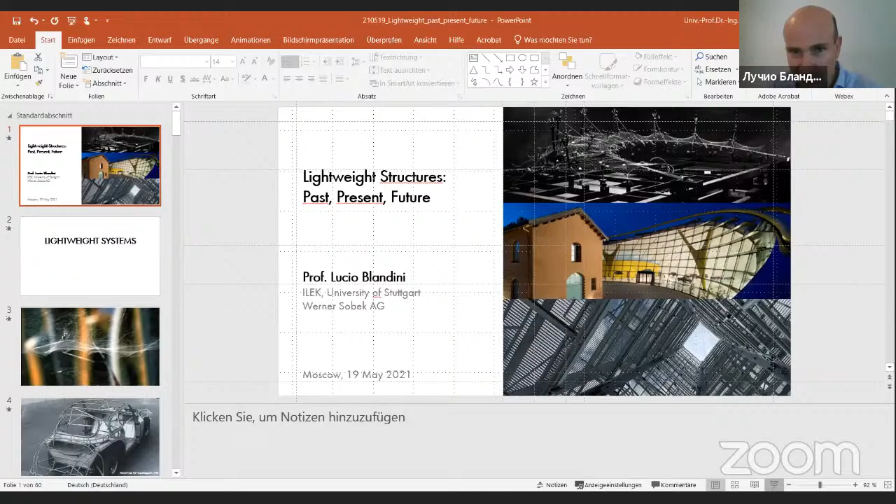I hope you can all see my screen. My lecture today is about lightweight structures, matching the exhibition ongoing in Moscow. It is about its roots in the past, its current development, and also trying to give a view, at least from our perspective, of how the future of lightweight structures and lightweight systems in general could be, given the challenges we all have to face in architecture for the coming years.

But before we get into the historical development of lightweight systems, I would like to go over the principle of lightweight: what we understand as lightweight, how many fields we see, and what sources of inspiration exist, because lightweight covers a really wide field. The very first source of inspiration is nature. It is not always like that, because nature does not always follow the principle of lightweight systems. But when we look at what a spider can create in terms of a lightweight system, this is an interesting source of inspiration, and it has been for a long time.

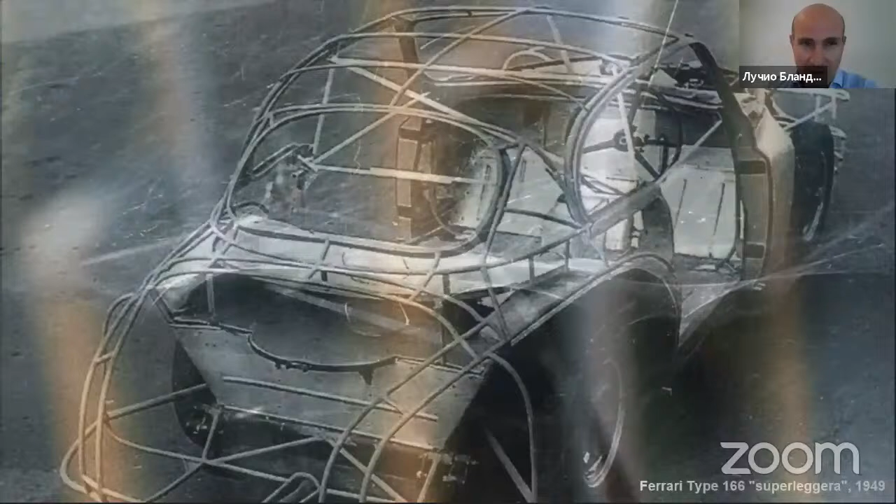There is a long tradition of lightweight systems in the automotive industry, and since we are following a historical path, I wanted to show this old race car made from Ferrari right after World War II, just as an example of how complex systems can be simplified, reduced, and optimized in order to minimize the amount of resources. At that time, it was about reducing fuel consumption, but today this approach has different consequences and interesting aspects linked to it.

On a similar perspective, we have a source of inspiration from the aeronautical industry, and the Concorde at the end of the 20th century was for sure a source of inspiration, pushing the boundaries in terms of material capacities of what a system can allow for—high temperatures, resistance to high velocities—and all of that was possible by making a very careful use of materials by combining them in a careful way.

Today we see lightweight principles adopted in sport, especially in the racing sport industry. Here, just as an example of many, the sail ship, which has been reaching a Guinness record in terms of velocity, exactly by using a lightweight approach and combining materials and design in a proper way.

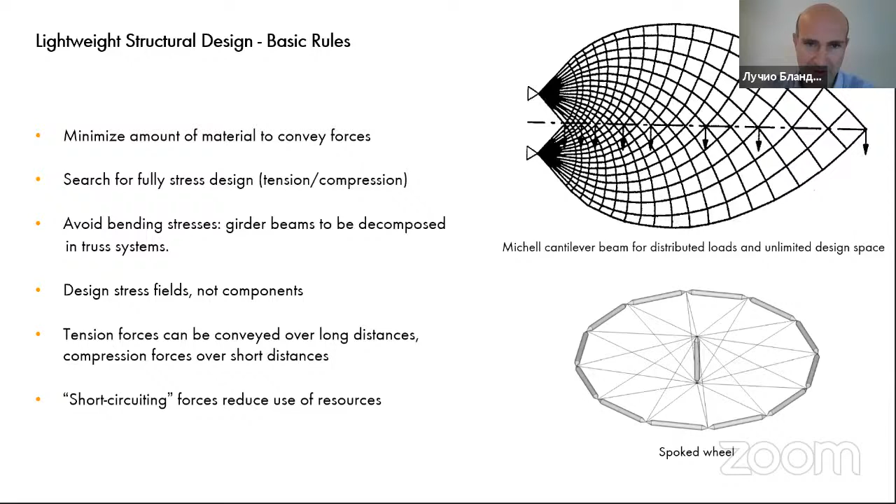So once at that, we can go through a kind of historical path over the last, let's say, 140, 150 years, starting with pioneers that at the end of the 19th century have been dealing with different materials and trying to make optimal use of that while reducing the amount of resources. There's been a generation at the end of the 19th century, at the start of the Industrial Revolution, dealing with steel and discovering its potential.

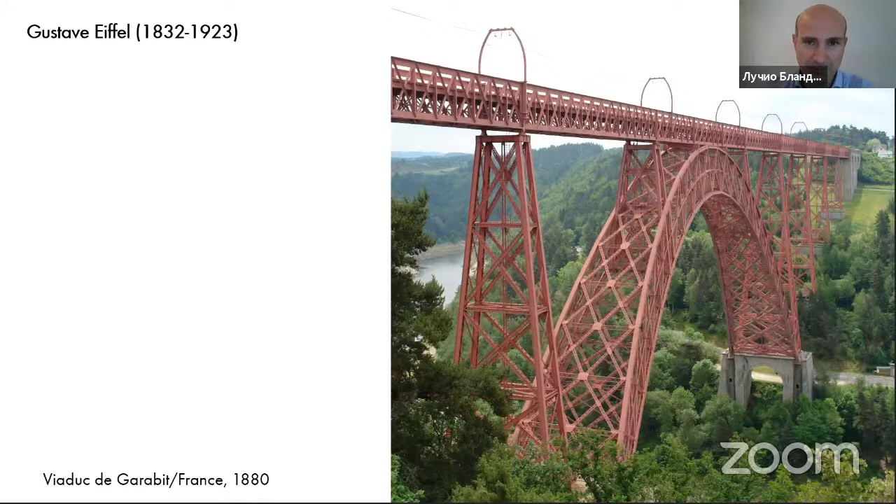Finding out that, like in this case, Gustave Eiffel did for a bridge in France, that by using truss systems, the amount of material could be a lot reduced. This is essential because, especially for big spans or big heights, reducing the amount of structural materials means being able to span or achieve bigger spans or reach higher heights without the structural dead load becoming determining. Even if we look at one of the most beautiful examples of this time, the Eiffel Tower,

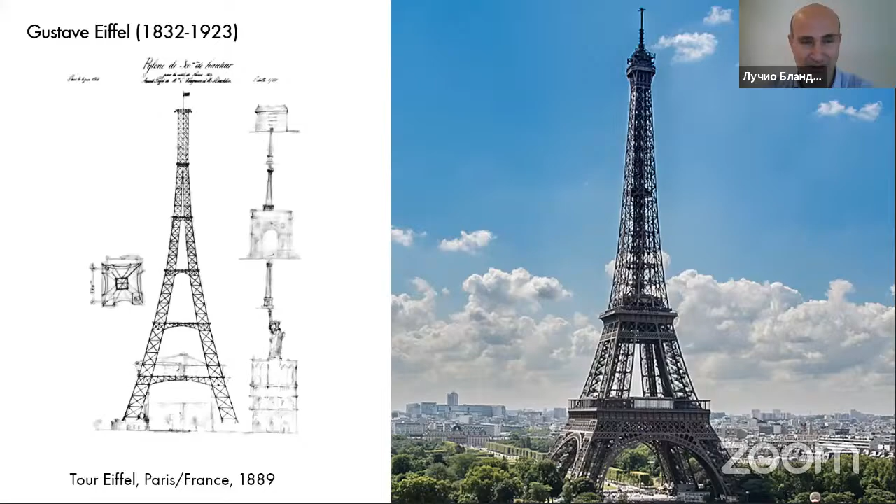What I find very interesting is that at that time, at the end of the 19th century, Shukhov was working for a contractor, and it was this tight collaboration with the manufacturing industry, and the scarcity of resources at that time, helping to push the boundaries.

And here, the power line, which is still nowadays almost 100 years after it was erected, is an astonishing example of how elegant the system is, not only in the final appearance, but also in the process of erecting it in an efficient way. I think this is what we need again today, to shorten the chain between design and construction to come to new ideas of how today such kind of resource efficiency can be achieved.

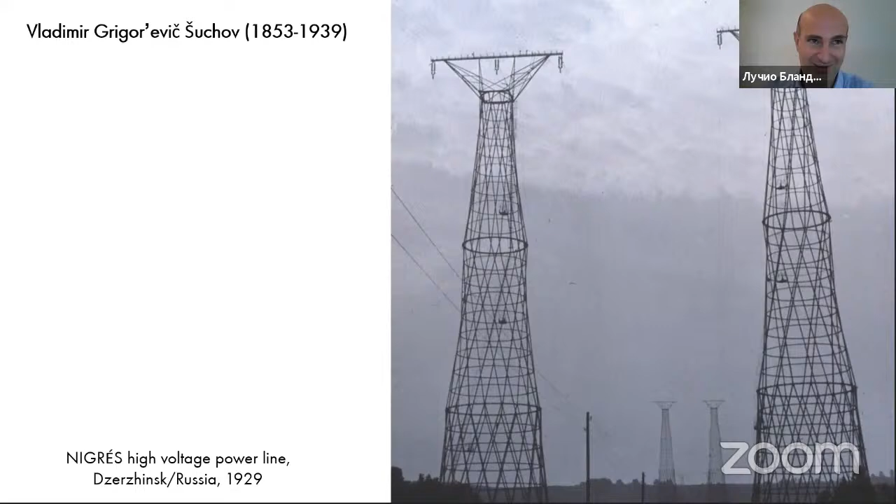So the past is not only an element to be looked at, but also a source of inspiration, and this is the spirit I put this presentation together in. When we look, for instance, at this bridge from Robert Maillart, it is incredible to see how at that time not only the form has been optimized, but also the construction sequences have been optimized to bridge this area. It still has, after such a long time, an incredible elegance in its form and in its capacity of getting embedded into nature.

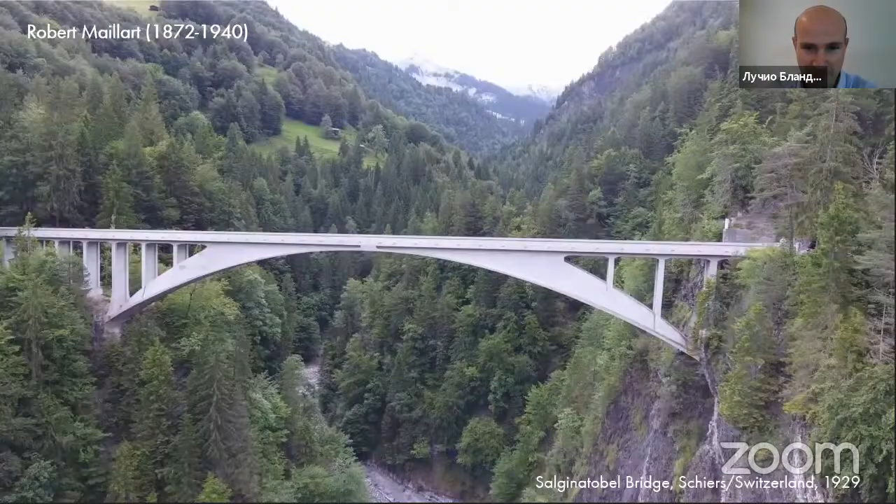It's interesting that after that, the most talented engineers have been challenging themselves with the use of steel. In the first half of the 20th century, the challenge shifted to concrete systems, and the interest shifted more from truss and tension elements into compression elements, just because concrete has a very good capacity to resist compression forces, and on top of it, a very good capacity to be shaped properly, following the forces. So there was a kind of competition between different engineers at that time.

And I believe this is one of the keys of lightweight systems nowadays: not to focus only on one material, but to combine the properties of different materials, and the heart of it is to join them properly.

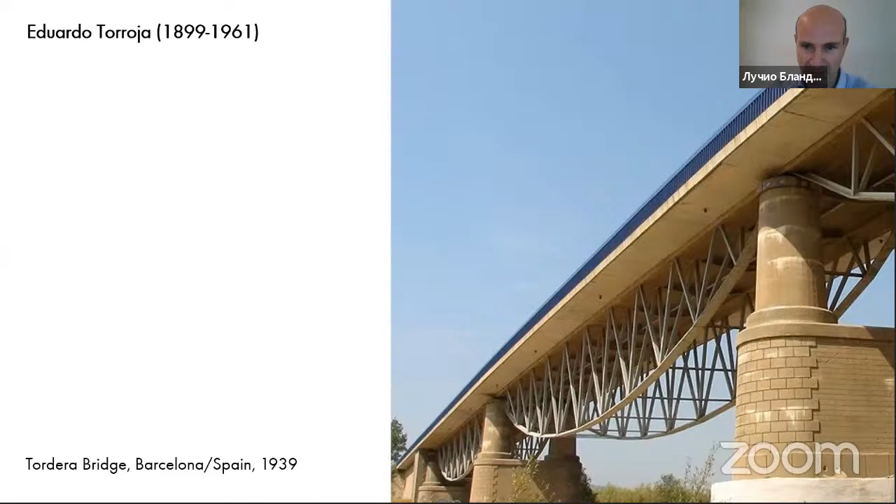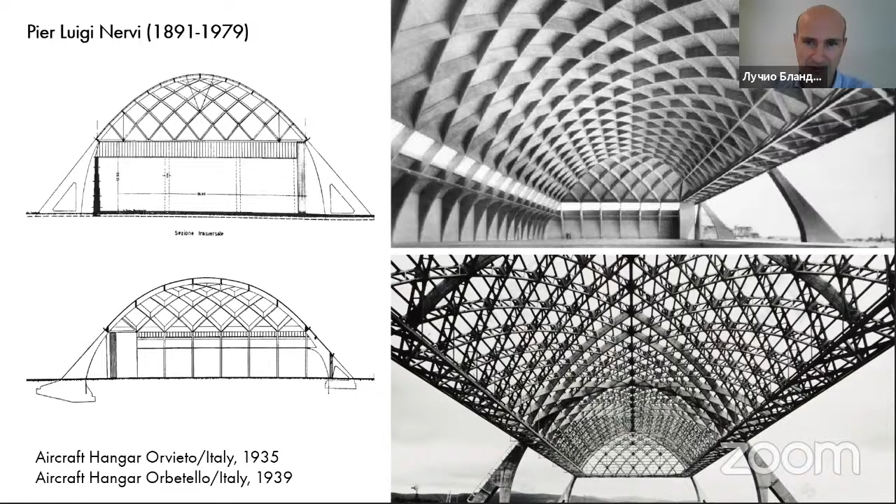One of the later results of this work is so-called ferrocemento, concrete with a high degree of prefabrication and a high degree of steel element, which can follow the paths of the forces. Remember what I was saying before about stress fields and designing stress fields—this is a clear example of that, materialized into an astonishing architecture which is still visible.

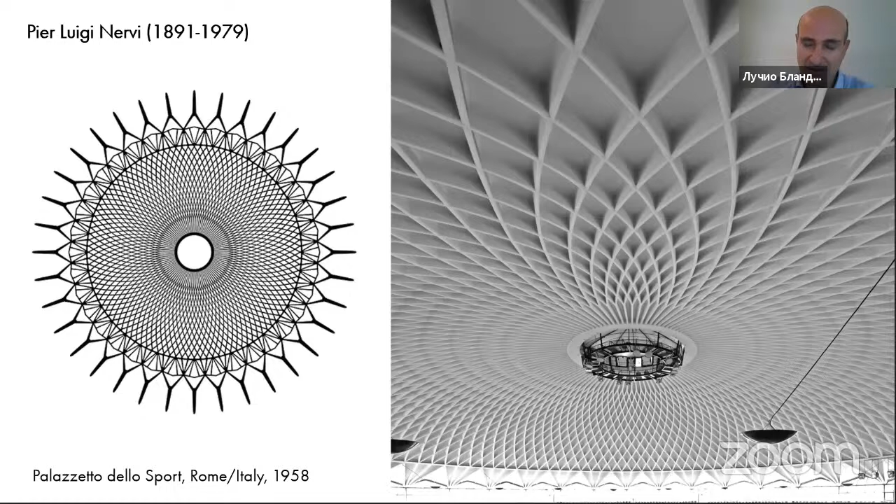I was there 20 years ago, before starting my career as an engineer, and it was astonishing to see how beautiful this roof is and how inspiring this work is. But still, we cannot just look to the past—we have to think how these examples can be reinterpreted today.

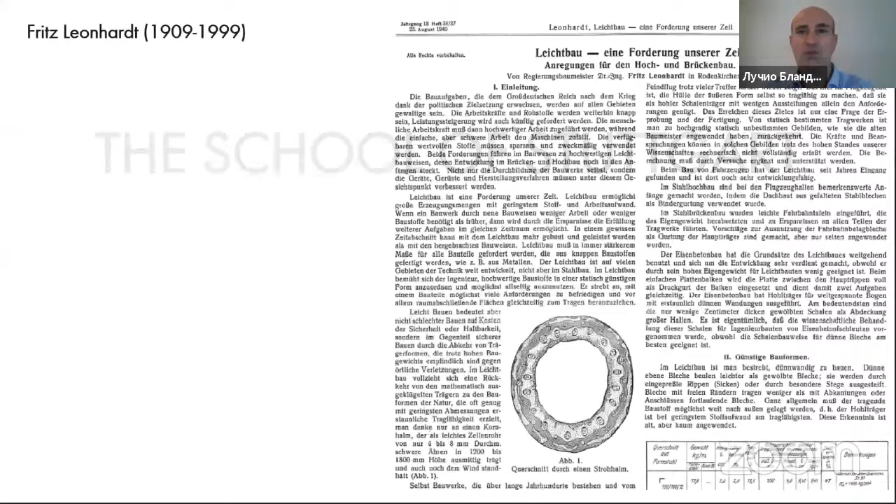That's why I'm following on what is happening, starting from this experience in Stuttgart. I would like to start with a contribution from Fritz Leonhardt, who I would say was one of the first persons to bring this interest for lightweight systems in Stuttgart, taking inspiration from nature, as you can see in this publication, written in 1940.

At that time, Fritz Leonhardt was just 31, and he was trying to push the boundaries again, explaining how important it is to use a different approach to the building world—and that was during the war, if you want, and to make proper use of resources. At the time, as it was in Russia before, it was about resource optimization, but this is still an approach that is very relevant nowadays.

And this approach has been leading him to a very interesting application of pre-stressed concrete. It was, in a way, a combination of the capacity of concrete to resist compression and the capacity of cables subjected to tension to integrate and compensate part of the concrete's behavior, in order to get an optimal combination of the two materials. So pre-stressed concrete on one side, and Fritz Leonhardt is one of the fathers of this technology.

But as you can see here on the television tower in Stuttgart, there is also the capacity to dematerialize the base area of this tower, over 200 meters high, by having a base element which is translated into a truss system through a conical surface. You have an exterior cone and an interior one, and you create triangular sections every time, which are very stable. What I still think is an amazing image is the drawing of the tendons at the base, which are pulling everything together, ensuring there is very little movement in the system, and that everything is tied together.

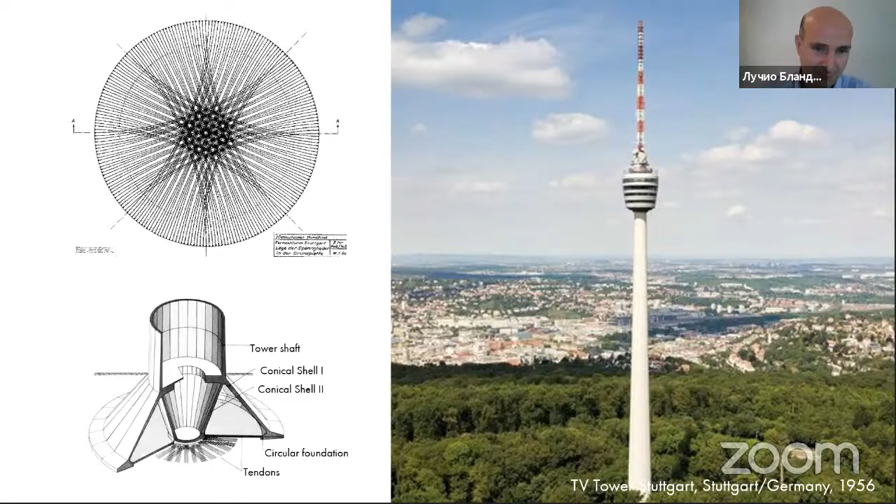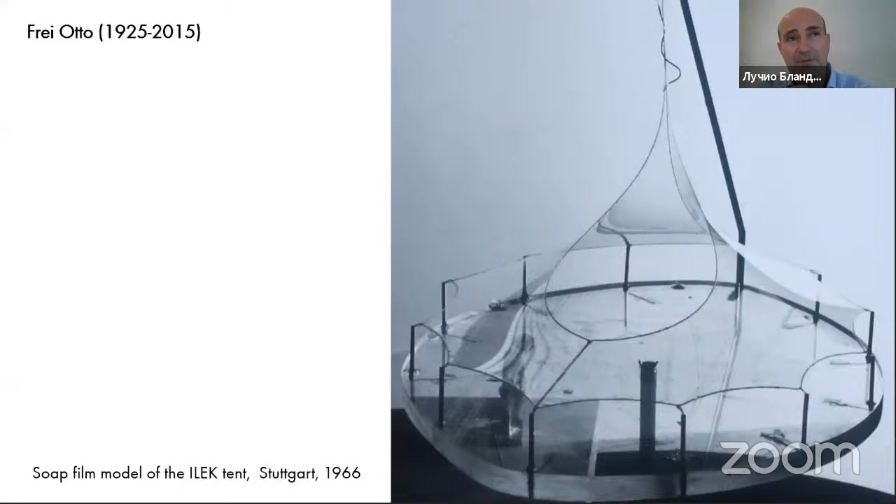And what I believe was very specific to Stuttgart was the capacity for each generation to invite other people to join them and continue this path, this search for lightweight systems. So we've been looking into steel systems, concrete systems, trusses, and tension elements.

The geometry of that was already pretty complex, but due to the fact that Frei Otto was invited by Fritz Leonhardt in the 60s to join him at the University of Stuttgart as professor for lightweight systems, things advanced further. Frei Otto was trained as an architect, but followed a very personal and specific path.

The formal research in terms of lightweight systems reached a completely new level of complexity, due to the fact that Frei Otto was very interested in using several experimental paths to find new forms. One example is the approach with soap bubbles, which deliver so-called minimal surfaces, which became a basis for new research into forms.

What you saw before is nothing else than the basis for the development of the institute as it is nowadays. At that time, end of the 60s, it was just a prototype for the Montreal exhibition. But this prototype, at a 1:1 scale of a small part of the Montreal exhibition, was so interesting that it was converted into the institute. Funny enough, more than 50 years after it was erected, it is still an amazing place to conduct research.

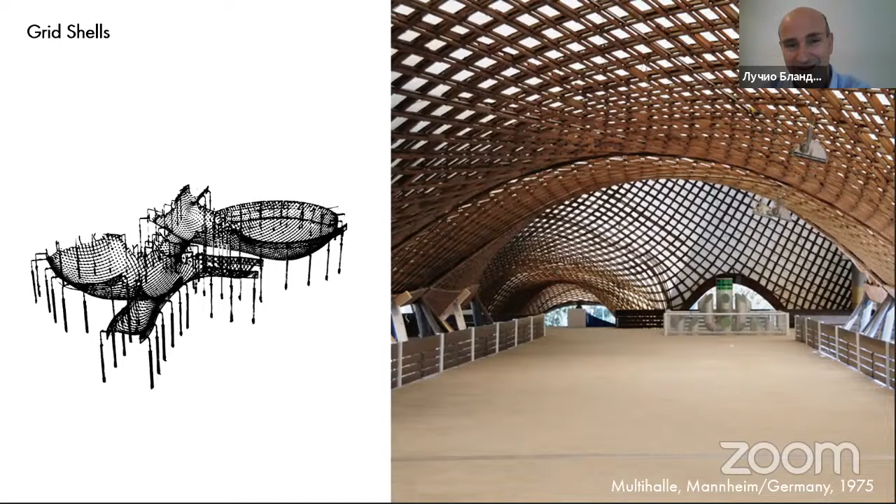What I would like to show is that this research of forms was not only related to tension elements, but also to the possibility of using these forms for compression elements. That has been turned into a cable system, reverted. This is an approach that Gaudí was already using in the past, but it was brought to a totally new level of quality by Frei Otto and then used for the Multihalle in Mannheim, Germany, in 1975.

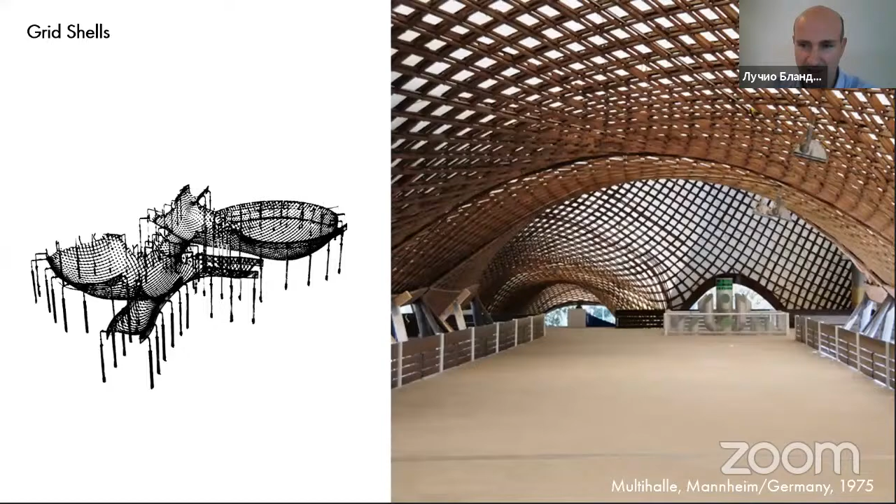And the interesting thing in my mind is that he was not only looking into experimental forms, but also looking at a wide spectrum of natural processes and trying to learn from that. It is not about copying nature. It is about using nature as a source of inspiration, because nature is not always following the target of optimizing the amount of material. There are different targets, and you can understand and reinterpret them if you go deeper into their behavior.

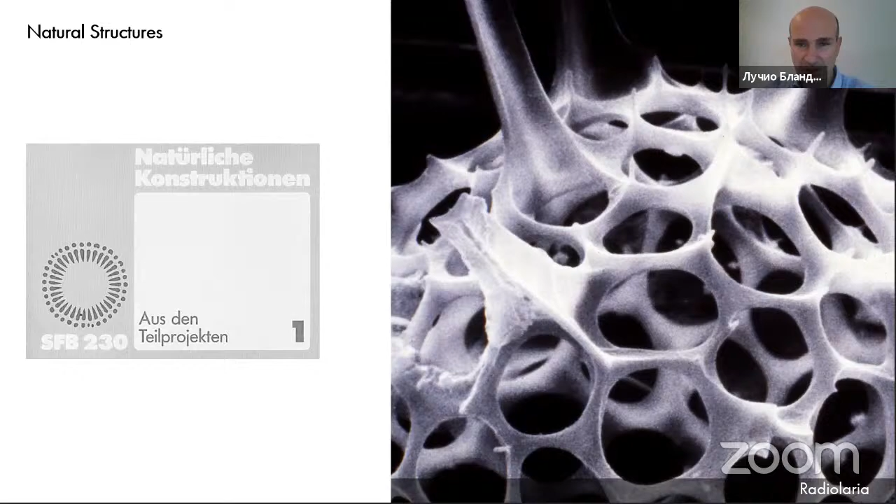There's been a big research project over several years, with contributions from several scientists, trying to understand how nature can be used as a source of inspiration for architecture. One of these investigations was about branching processes. Some people talk about tree systems, but I believe it's not that much about trees - it goes beyond that, because trees also follow different rules than just resource optimization. It's also about optimizing the amount of light exposure, and it has to do with growth processes.

But still, there are a lot of examples of branches and branching aspects in natural processes, and this can be extrapolated and translated into architecture, as has been done in the Stuttgart Airport, built in the early 90s.

In the 90s, there's been what I was referring to before: a very fruitful collaboration between Russian and German scientists exploring the work from Shukhov. I was reading that in the past as a PhD student, and I was reading it again in the previous weeks. It is still amazing how much we can learn from these past experiences.

Let me now focus for a second on the Olympia Roof in Munich, since this is, I think, one of these cases where several generations of people have come together in Stuttgart and allowed for something very special to happen. If you see how complex this whole landscape and architecture is, at that time it was just the architectural model.

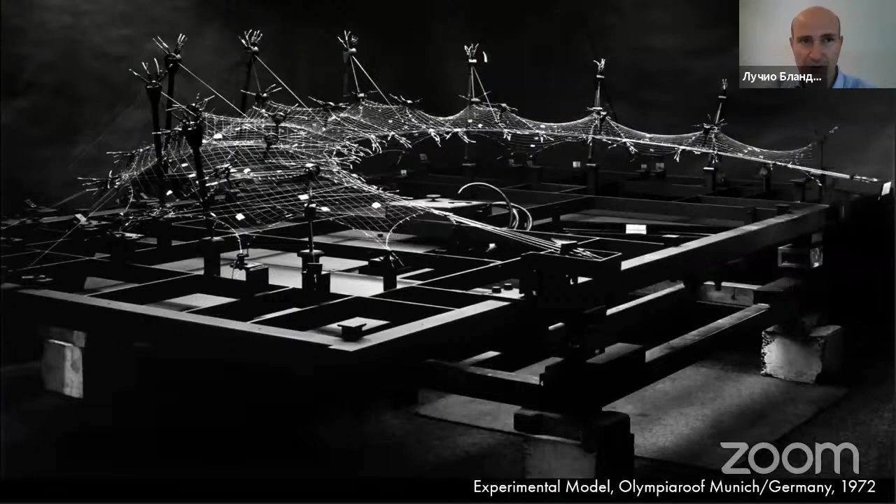But to translate that into built architecture, there was a long and very pioneering process. It required, with the tools available at that time, a lot of methods that have been developed in Stuttgart, starting from advanced modeling strategy, into possible translation of these models through photogrammetry, into geometrical description, into the early tools of calculation.

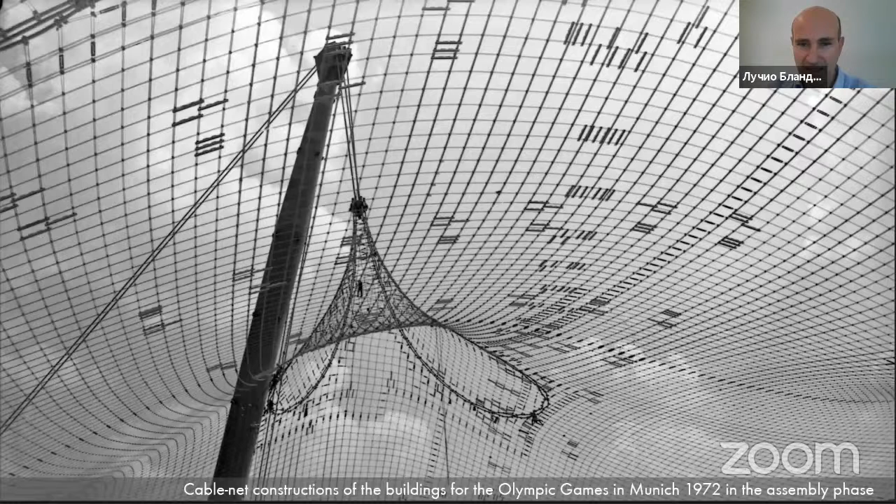Not only a classical academic school, it's really a school of thought where these people show that bringing together, in a tight way, praxis, experience, willingness to push boundaries, and scientific research, can bring astonishing results. And the result - one of the masterpieces - is the Olympia Roof in Munich.

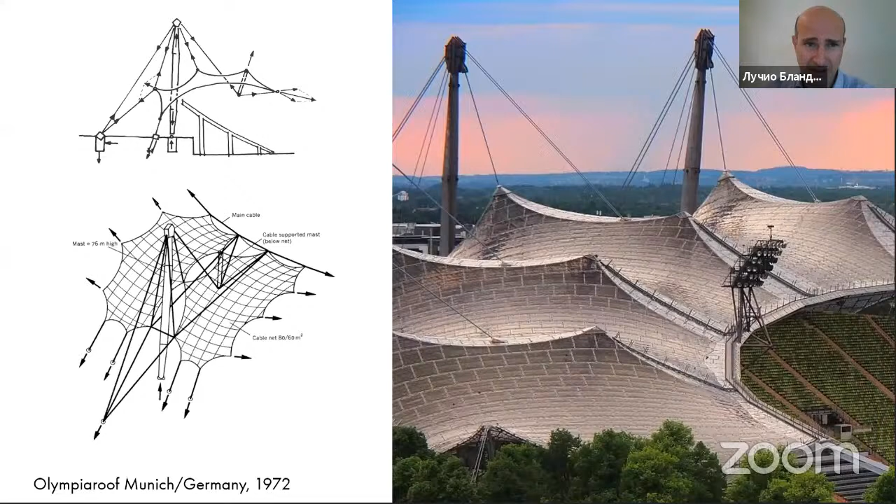You see on the left how Jörg Schlaich and Fritz Leonhardt, as engineers, made the complex behavior of this cable system pretty easily readable if you look closer. I could talk long about that, but it wouldn't fit in the time frame, so you can read more about it elsewhere. It's really about how you can reduce complexity in such a way that you can keep control of it and achieve very inspiring architecture out of it.

Done in 1989, here too you can see a combination of tension structures and compression elements, as we saw in the work of Fritz Leonhardt, but brought to the next level, as visible in the Max-Eyth See in Stuttgart.

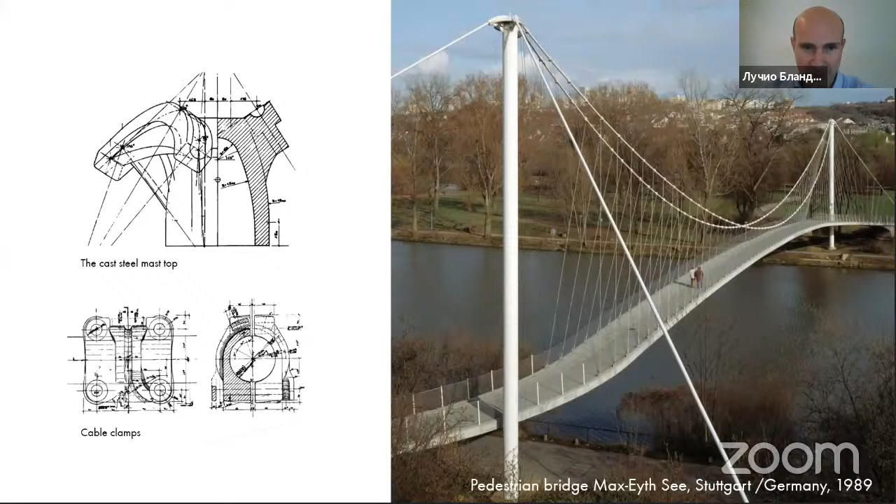Interestingly, a lot of these details have their roots in the research work, the scientific work carried out at the University of Stuttgart, to allow the Olympia Roof to be built with a high level of safety, even though there was a lot of experimental work behind that. Further works on tension structures, of course, include a big stadium. It's a field where Jörg Schlaich and his team have been, I think, pushing the boundaries over the last decades and leading to very interesting results.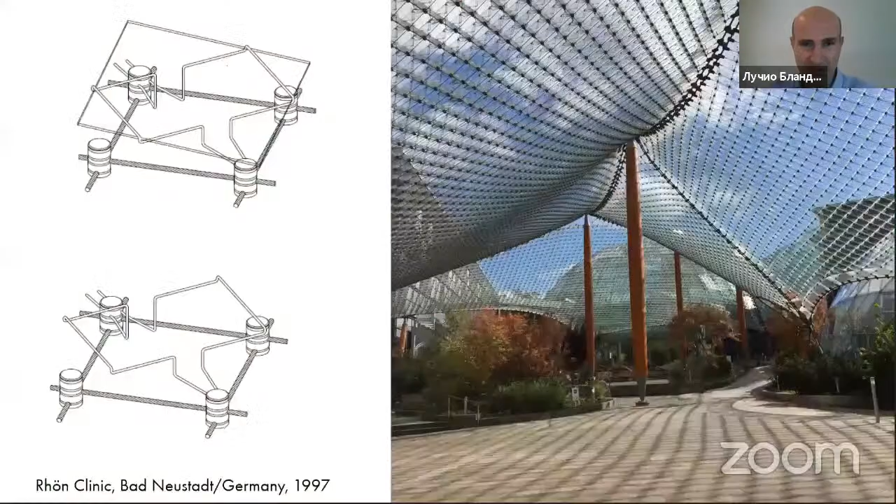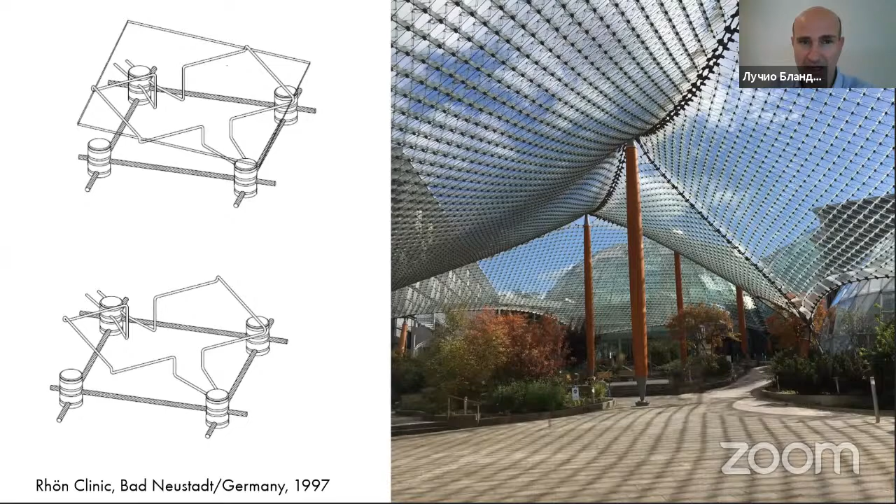Here's a new interpretation of the cable net system at the Rhön Clinic, based on the idea that one typical detail allowing different shapes and cladding elements can be the basis for this idea of the tent. You can see a bridge to the early work of Shukhov I showed at the beginning, but reinterpreted in a totally different way—this is how we keep reinterpreting and reinventing lightweight approaches and principles over time.

One of their last shared works, Werner Sobek and Helmut Jahn were responsible as architects for this astonishing, very elegant tower—an experimental tower for high-speed elevators with a high level of elegance, bringing a tension element and fabric as a facade system, allowing much better shadowing of the concrete tower behind it, and overcoming some of the problems visible at the television tower engineered more than 50 years before by Fritz Leonhardt.

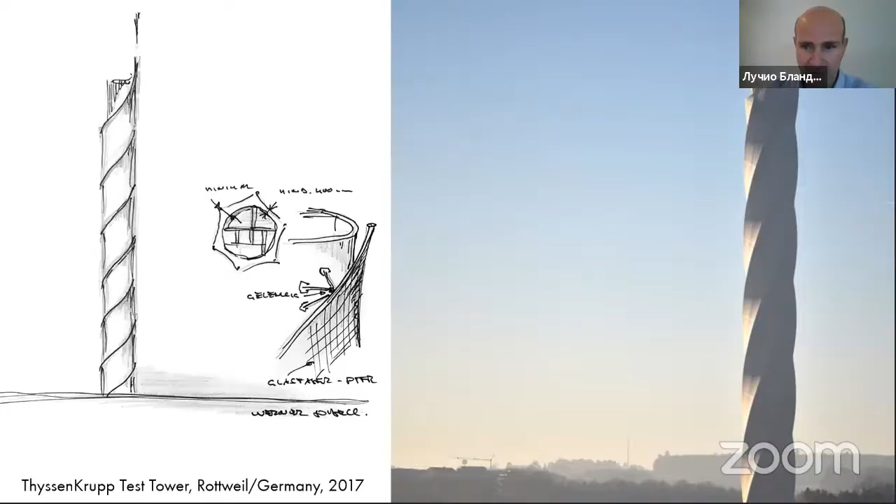As I was saying, the Stuttgart school was based on the tight connection between practice and research. Let me explain the research carried out also by Werner Sobek at the ILEK, following the work from Frei Otto on one side and Jörg Schlaich on the other. Werner Sobek merged these two paths in a kind of symbolic sign, bringing back together the disciplines of architecture and engineering into one field.

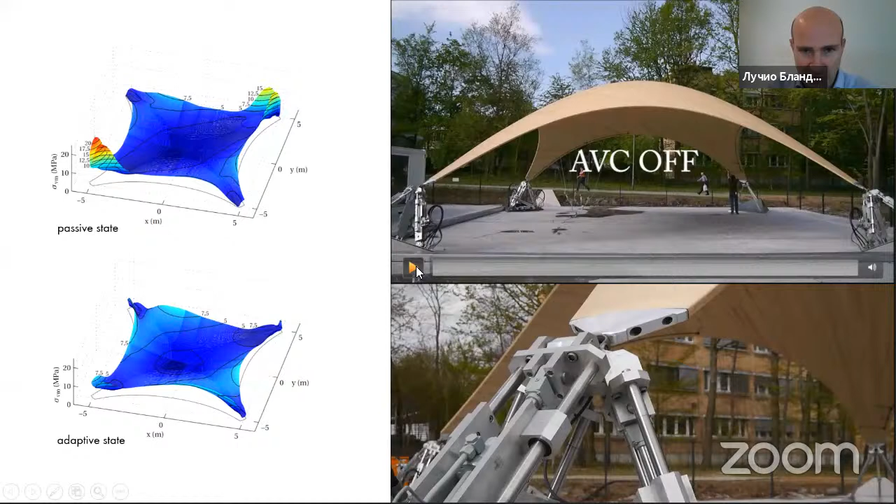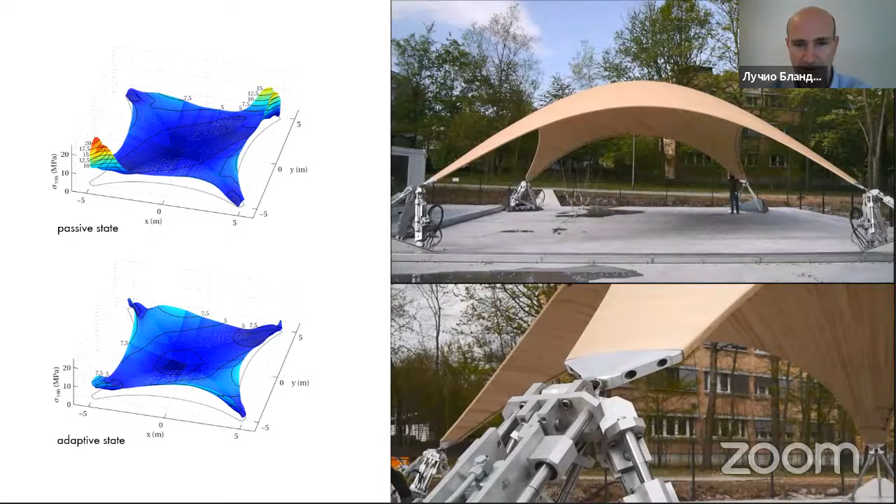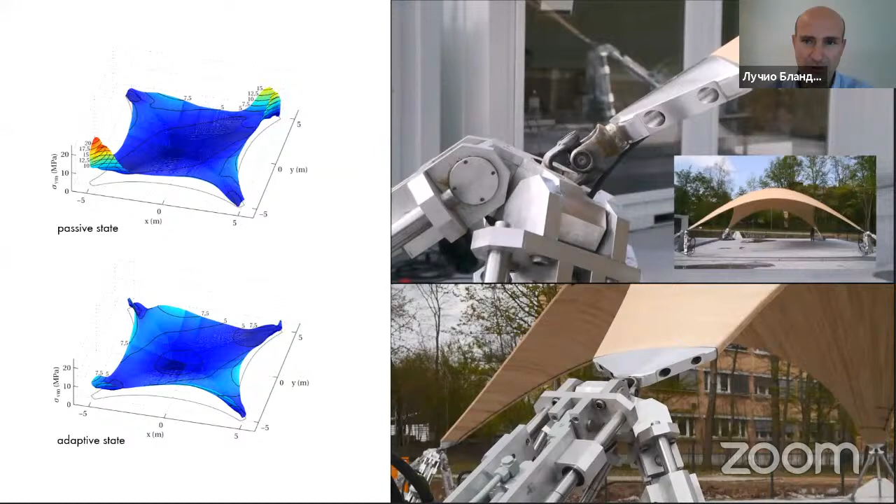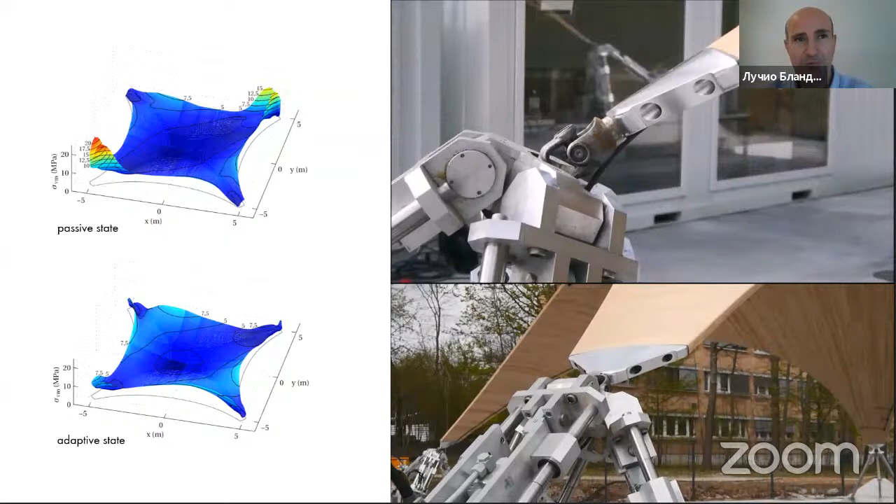Pushing for a synthesis of these fields in the search for ultra-light systems, like this adaptive shell—by using high-technology devices coming from the automotive and aeronautical industry, with sophisticated algorithms, it's possible to reduce the stress utilization of this very slender wood system, allowing a shell structure that's already a very optimal system for one configuration to adapt its shape and become optimal for several configurations.

Another very promising field of work still on our agenda is the optimization not only of the outside shapes but also of the inside by using gradation. This is a technology explored in other fields, but it was investigated for the first time more than 20 years ago in a concrete structure at the ILEK, and it's now, after more than 20 years, leading to very important results—we hope it will be transferred into architecture very soon.

You see here prototypes designed by Daria Kovaleva for the Rosenstein Pavilion, as an example of how this optimization of shell systems—in terms of optimizing the cavities and where to place them—together with a search for a direct chain from design to production, can lead to very interesting architecture. I believe there's a lot of space for that.

Now, coming to the end, let me quickly show a couple pieces of my personal work, starting as a PhD student at the ILEK—you see the institute in the background—and my very first prototype of a glass shell, just 1 centimeter thick, 8.5 meter span, showing how glass could become the new concrete in a way, reaching a new level of transparency by completely avoiding steel. So it's the next generation.

The ring is made by titanium in order to have movement of this system following temperature excursions.

This has been made possible. The roof has been engineered without any expansion joint, out of aluminum elements fit to place. It is all based on the approach of working together with contractors to achieve these kinds of qualities.

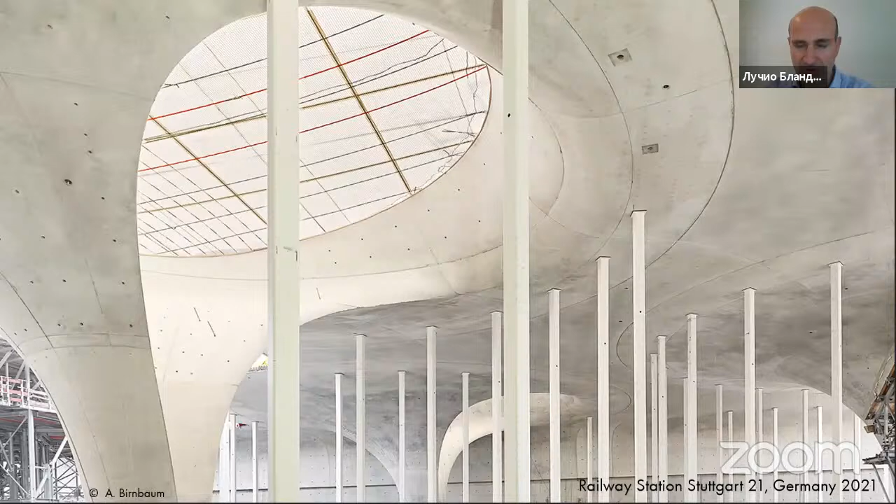A similar approach has been used for what I call the next generation of shell structures, concrete shell structures. There's been a long time where shell structures have not been built anymore because their casting has become very expensive, so we cannot use the same technology as was done in the 20th century. We have to reinvent that.

I believe parameters are nowadays one of the key tools that will allow such complex systems to be built within a reasonable economical frame, while still leading to resource efficiency in a different way.

The last generation is the Kuwait airport, which I've been working on over the last five years before joining the ILEK as the new chair.

The steel elements will be dismantled - they are just temporary structures, a scaffolding system in a way. So think how this roof will be without the steel elements in the future, because this is just a temporary element supporting it, like scaffolding.

It is allowing now for the next generation of concrete roof to be erected, since these elements are cast using so-called adaptive molding systems - the same machine is able to cast different forms. I cannot go into that much detail right away, but by using this development, tying digital fabrication tools to engineering and design, it is now possible to think about the next generation of concrete roofs that make this very efficient system economical and feasible again.

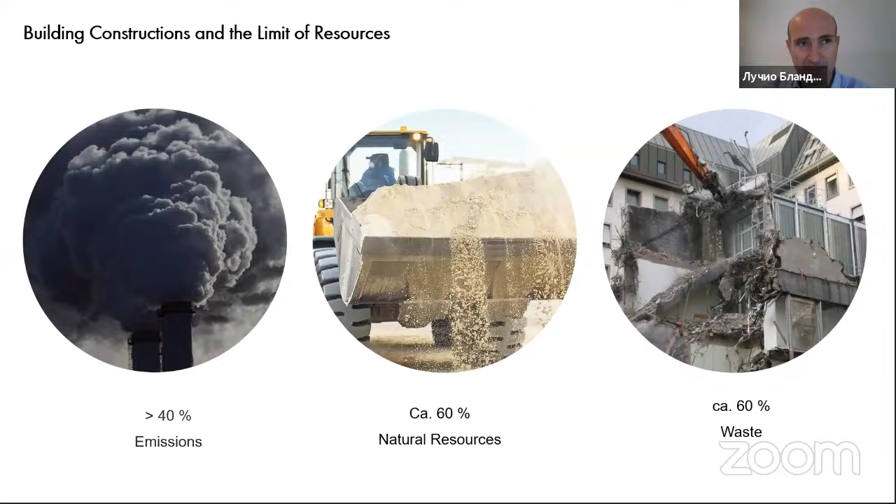It's a luxury that we cannot be responsible for anymore. Now I think we can touch base on the principles that have been shown in the past, and our responsibility is to show a wider field of application of that. It goes beyond just shorter spans, bigger spans, or high towers.

This is a bit what we are trying to do at the university also in terms of research fields. On one side, we are sticking with adaptivity, using, as has been done in the past, an actuator system, like muscles if you want in a human body, to make structures specifically light. This is possible for a new structural system, as this tower, which is 36 meters high.

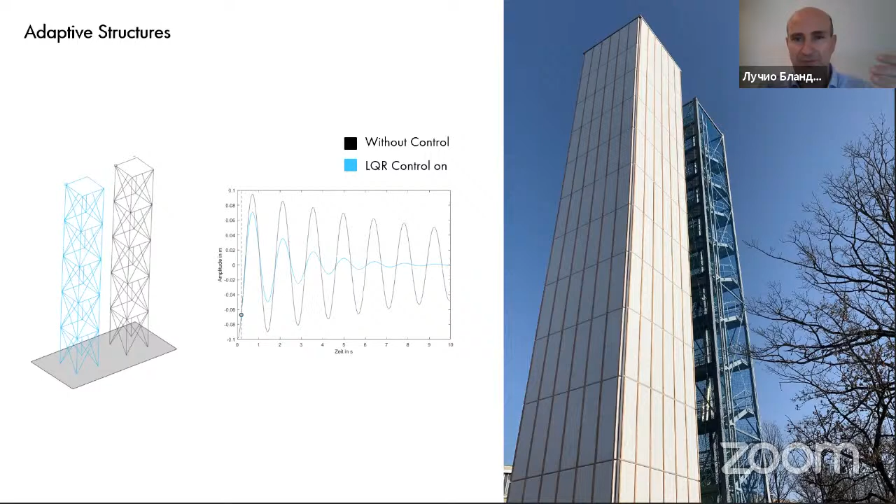But you see also here that we think adaptivity is not only about adapting structures and allowing for more than 50% optimization for the structural components, but it's also about facades. By working on facade systems, as you can see on the right, with a smart facade system - a liquid crystal solution - it's about use of energy within the space, so it's about performance, but it goes much beyond that. It's about a new kind of architecture.

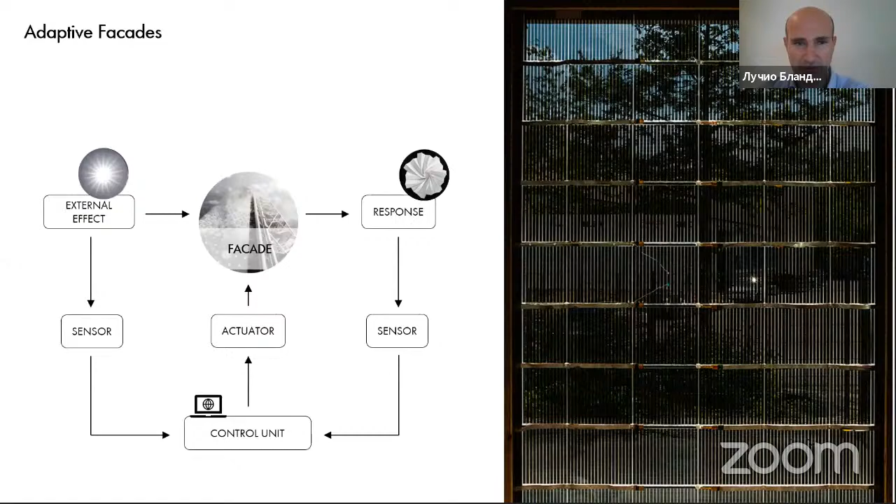If we think how dynamic our life nowadays is, and how static the part of architecture is that we're living in, also in terms of retrofitting existing buildings, we have the chance of using this kind of solutions and technology to generate a new kind of much more dynamic architecture. This is what we are currently working on, and what we believe is going to be one of the possible ways in the future.

If you think about concrete and mineral elements, there are a lot of people working with wood, which I believe is a good thing in terms of ecological footprint, but you cannot just substitute all our structural elements with wood, because we don't have all these forests, right? And we couldn't have. So we have to use wood where it makes sense.

We have to still stick with steel in certain applications. We have to use concrete in other applications. But the question is how we can make concrete more sustainable. At the moment, we know that concrete is responsible for 6 to 8% of the production of CO2, and this is something that we cannot stick with.

So at the moment, we are working with biomaterials and bacteria in order to have the cementification process activated not by a chemical reaction which produces CO2, but by bacteria that don't release CO2. This is a project we started this year, and we believe this is also one of the futures of lightweight construction - not only in terms of material performance, but also in terms of the light footprint, the ecological footprint of our architecture. And this is, in my mind, the future.

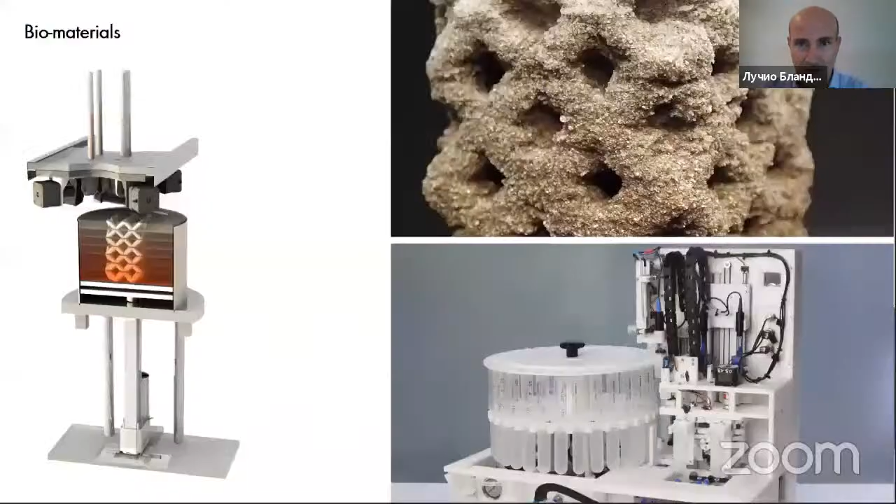It's a process that takes around one year. We've already been releasing the first bay, the smaller one. If you look at this picture, you see that the bays are changing parametrically, and the smaller bays have already been released.

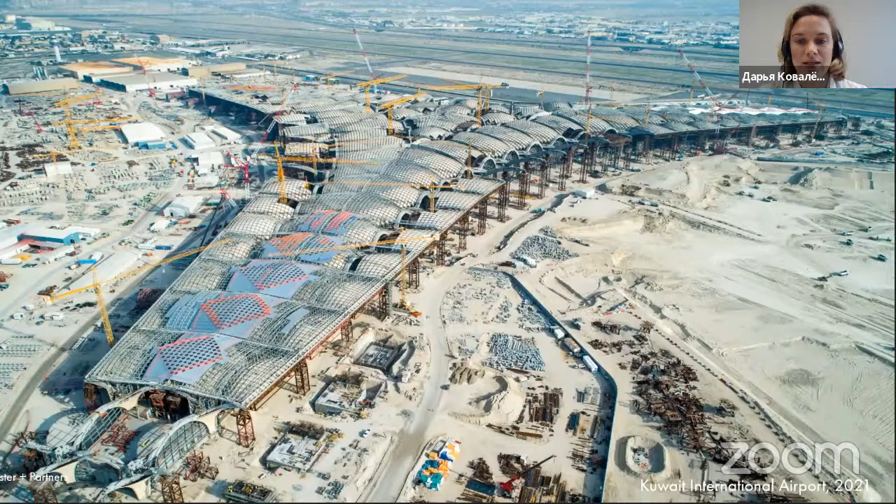It's about the destiny of classical Leichtbau, lightweight structures. The question from Valentin Grudsky: first of all, thank you very much for the lecture, but there is a feeling that the examples of lightweight structures from the beginning of the century or the second half of the century are not frequently used anymore, but they look lighter and more pioneering than contemporary counterparts. Is it related to it being very complicated to calculate them, or complicated to build them? Or maybe they are not aligned with the tasks of investors or economical requirements. I think this is a real provocative question, but it should be asked.

That's a very good question. I believe it is related to the economical shifts of our current time. In general, in the past it was much easier to be more advanced in detailing, in optimizing the use of materials, just because materials were much more expensive themselves, especially technological materials, as it was in the 19th century, or concrete in the 20th century. Concrete was not expensive, but the point was that manual work was very cheap. At a certain point after the 50s and 60s, this turned around.

The point is that we got to believe we could extract material endlessly from the earth. Since extracting sand or other special mineral materials was very cheap, I believe the economical push and interest has made, just to give an example, a flat slab much more economical than a ribbed slab, even though a flat slab uses double as much material as a ribbed slab. So this is the first aspect.

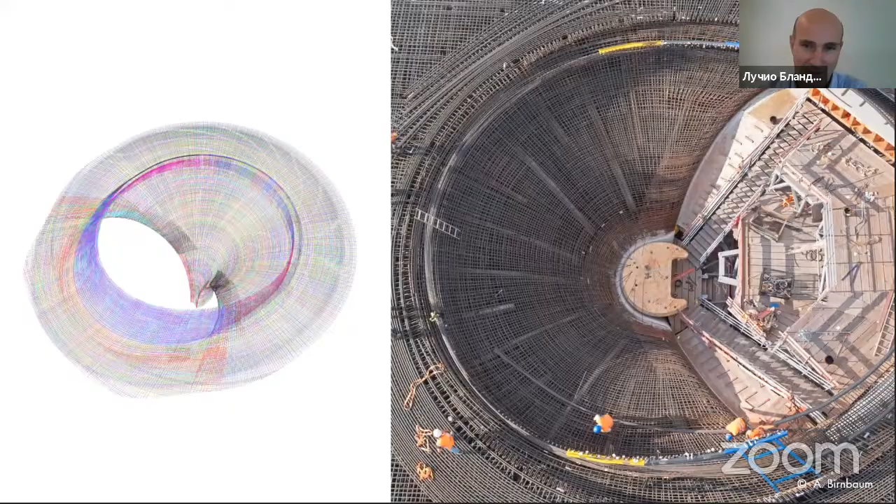I can understand that provocation. But at the end of the day, if you think about the size, the spans, and the amount of columns that you have, and the bending that you would have otherwise, this is still, in terms of the amount of concrete used related to the amount of supports you have, an economical solution. This is due to the fact that the forces are not like that, where you have a problem in classical bending, a problem in classical punching problems for the engineers among you. It's more like there is a continuous flow of forces.

And yes, I do agree that there's still a lot of space to make this structure more efficient. And I do agree that there is space for making the reinforcement of these elements more elegant. But again, we have to work with constraints.

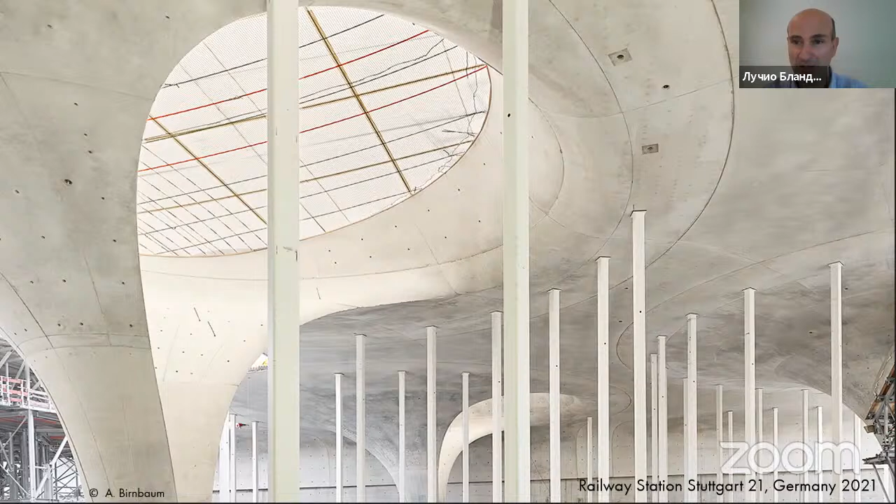So in other times, I would have been thinking about different ways of reinforcing that, or probably ways of using rib systems, just to create a link to past projects and possible alternatives. But we are not yet so far that the scaffolding of this rib system is more economical than putting more steel inside these shells. And actually, the shell edge is just 30 centimeters thick, so they are very slender.

But on the other side, if you look into this kind of solution, that goes more in this direction: you have just 16 centimeters of concrete, and the rib is created by steel. By doing that, you are using both materials in a much more optimum way, and it's not just the full amount of material. But if you would ask me, I could tell you there's still a lot that you could do to reduce the amount of concrete and steel there. So when I look at these examples, they just show me one step onto a path, but I see still a lot to be done to push this further.

When constructing such structures, for example the airport in Kuwait, a lot of additional scaffolding constructions are used. Can such structures or substructures be unified or reused? If the structure is unique, from the point of view of ecology, could you account for the construction, recycling, and reuse of such additional substructures and their effect on the ecological footprint?

Good evening. Can we know a little more about the experiment with the glass shell and the titanium ring? Which dimensions of the structure are we talking about? Did you continue to develop this research? And the second question is about the functionally graded concrete - what do you think are the perspectives for using such material in the future, and when, if ever, will it be used everywhere?

Okay, on the glass shell, the technical details - the glass is 1 centimeter thick. It is laminated, 8 millimeters plus 2 millimeters, laminated. The lower level is chemically toughened. It's a technology coming from the aeronautical industry, so this way we have a very thin laminated glass. In a way, it is what you see as the basis for windshields, for instance, in cars, trains, or airplanes. The titanium is shortcutting the forces coming from the shell.

And if you remember, that was one of the principles I was referring to. The reason to use titanium is that its expansion coefficient is the same as that of glass. That means if you had used steel, which would have been more economical, you would get thermal constraints, translated into more thickness, which is what we try to avoid. That's why we use titanium. And the vertical elements are actually used as compression elements - usually they are tension elements, but since we use them small, like 40 to 50 centimeters high, it's possible to keep them very thin. Just to recall.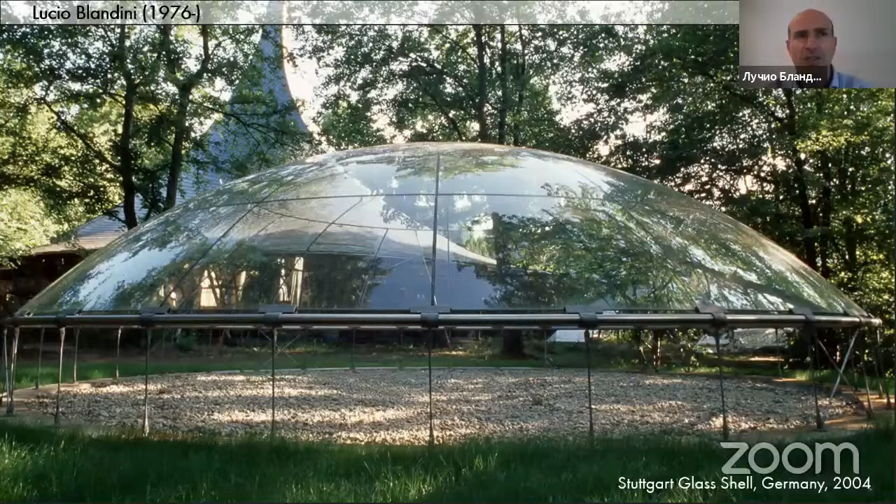Yes, where should I start again? Okay. So this is about the shell. I hope it addressed the question.

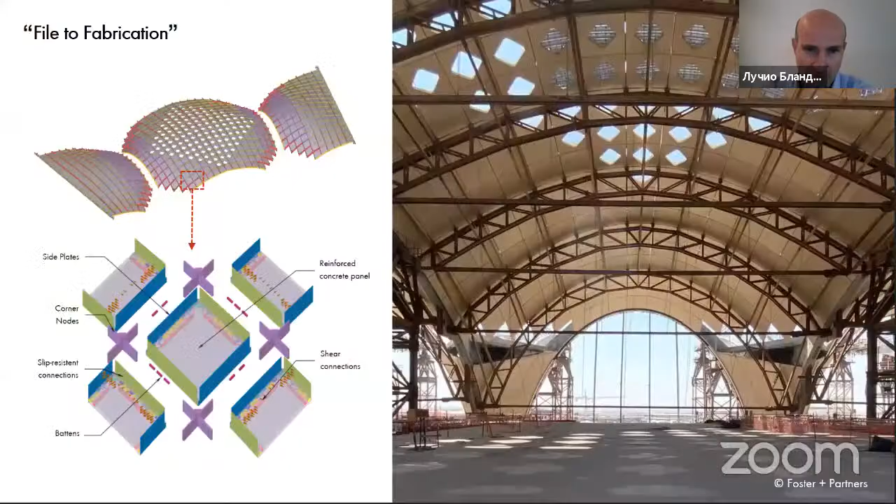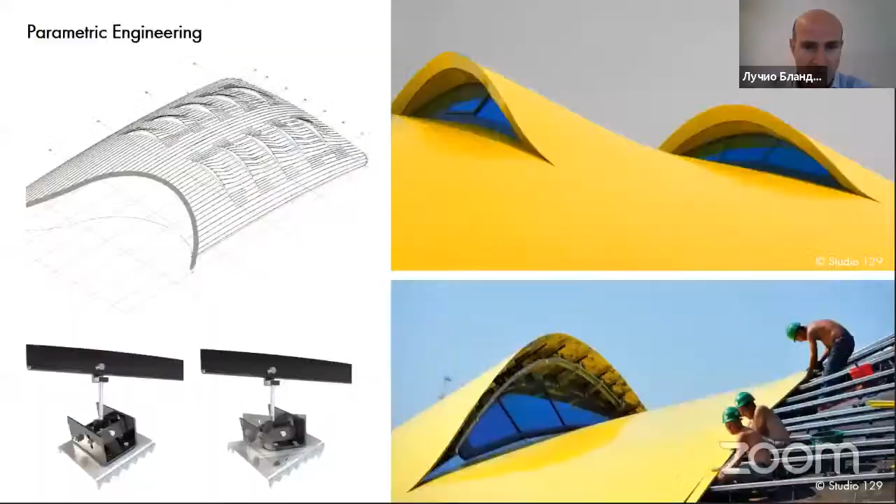Talking about graded concrete, we see a big field of possible usage for mesogradation, for instance as an alternative for slab solutions. Just by using big mineral hollow spheres, you can have big cavities. What you see in the image on the bottom right is more microgradation. But we discovered that if we have bigger holes, as you can see in the diagram on the left, you get a much better relationship between hollow sphere empty spaces and full material.

And that's why at the end of the day, it's lighter. We're talking about 50% of resources. Slabs are responsible for one of the biggest uses of concrete in high-rise architecture. So we believe that if we reduce the amount of concrete for slabs, we can have smaller columns and smaller foundations.

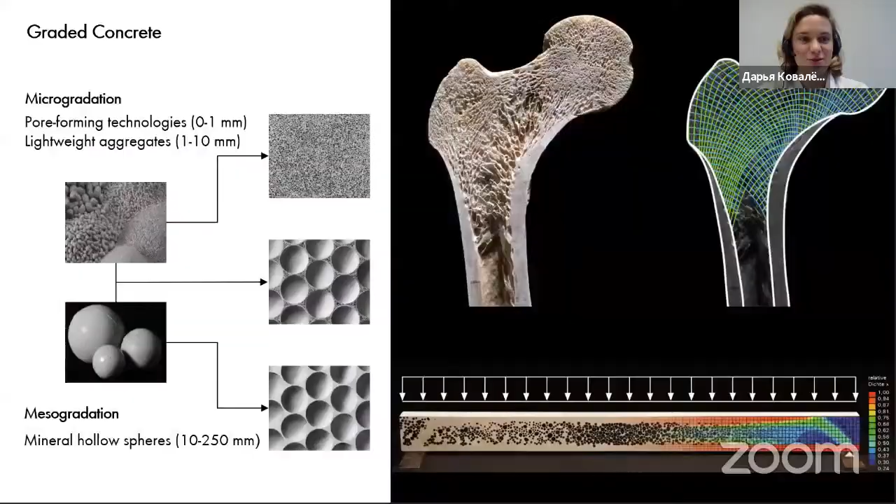Coming back to Fritz Leonhardt's title from 1940, lightweight structures is a requirement of our time—I think it still is. The time has changed, the requirement has changed, but lightweight structures are still the requirement of our time. I read the original article a long time ago, then reread it, and later read comments on this article from Jörg Schlaich, and I know the comments from Werner Sobek. It's very interesting to see how different generations coming from a similar school have touched on this work, now 80 years old, written by a young engineer, 31 years old, and they still see how contemporary these thoughts are. Of course the applications are totally different, but the intellectual approach behind it is still fully valid, and we just have to grab it further.

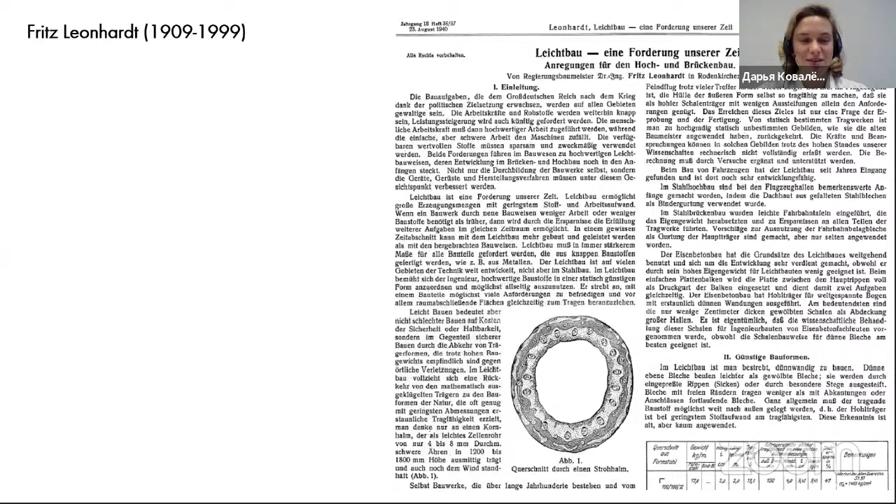If there are no further questions or counterpoints, I think on this great point and great thoughts for the future, we will finish the lecture.